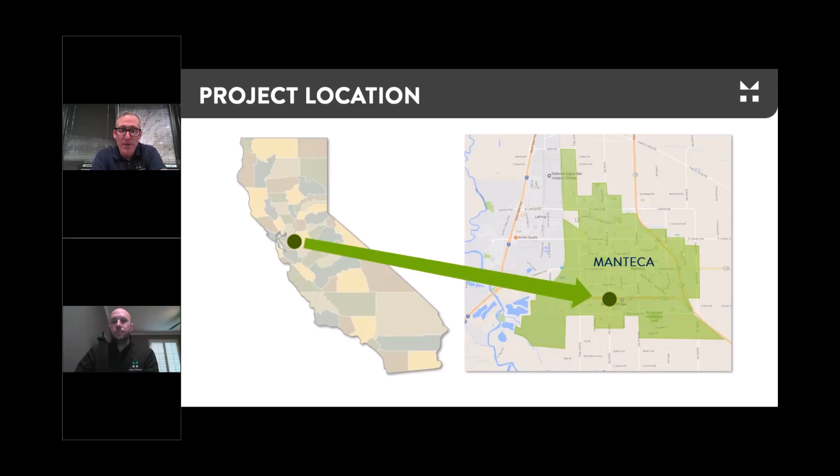Our project was right along State Route 120 at Union Road. State Route 120 was built originally in the 1960s as a 2-lane facility and was widened to a 4-lane facility in the 1980s. There are three main interchanges along State Route 120, with Union Road right in the center, bracketed by Airport Way and Main Street. What you might not be able to see from this photo is the significant residential development on the north side of 120, and a significant amount of ongoing and planned residential and commercial development on the south side of 120.

State Route 120 really experiences peak traffic. It's one of the main routes from Stanislaus County into the Livermore area, and a main connection between State Route 99, I-5, I-205, and I-580. So it really does experience a peak volume of traffic going into the Bay Area in the morning and coming out from the Bay Area in the evening. That's just the existing site conditions.

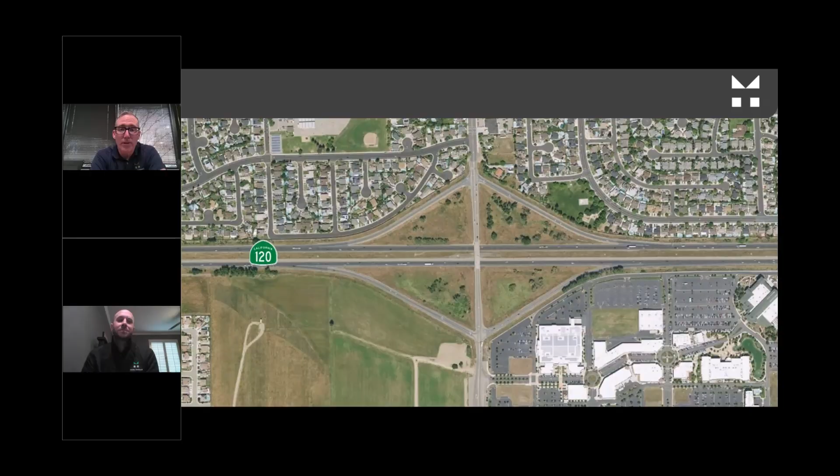Another photo showing the specifics of Union Road. Prior to our project, it was a spread diamond interchange with a 2-lane overcrossing and signalized ramp terminal intersections that were constructed in the mid-90s.

So the city had been working on planned improvements at 120 Union Road since the late 2000s. What you see on the screen there is what had been originally planned: a typical Caltrans L9 partial cloverleaf interchange with a bridge widening and associated ramp improvements.

At the time, the city brought that project to about the 65% design level and then started to run into some real challenges with mainly the overall budget for the improvement. This was about a $30 million interchange in the late 2000s, probably $35 to $40 million in current dollars. The main budget challenge was that the addition of those 2 loop ramps would have required replacement of the entire bridge structure. There were vertical clearance challenges with the loop ramps, requiring a completely new structure to be built. So at the time, around 2009, 2010, the city put the project on the shelf.

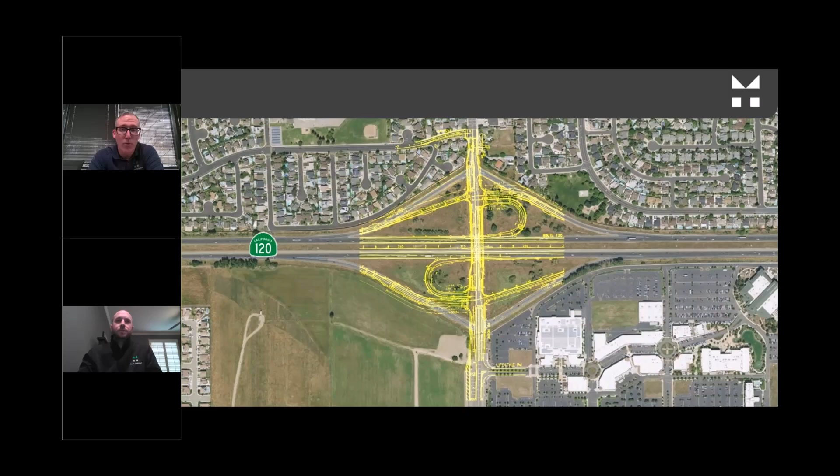There was obviously a downturn in the economy at that time as well, and so the project sat dormant for a period of 4 to 5 years.

As we started talking with the City of Manteca about revisiting the interchange improvements at 120 Union Road, there was some forethought by the city to look at alternative and innovative design concepts. What you see on the screen is a skeleton version of the Diverging Diamond. Around 2013, when we got involved with the city, we knew the Diverging Diamond technology existed in the United States—there were probably 20 to 25 of them in operation or in plan development throughout the country. But Caltrans, and no one in the state of California, had done a Diverging Diamond configuration.

At the time we did some initial high-level traffic analysis to understand if the Diverging Diamond was an option that would relieve congestion, not only on State Route 120 but on the local road along Union Road. We did enough traffic analysis to know it was a viable option. That high-level analysis was presented to Caltrans to see if they would be open to the concept, and in fact they were.

So in about 2014, we started detailed development of traffic forecasting, environmental documentation, and concept geometrics, moving the project through a reinitiation of the environmental document phase and into final PS&E.

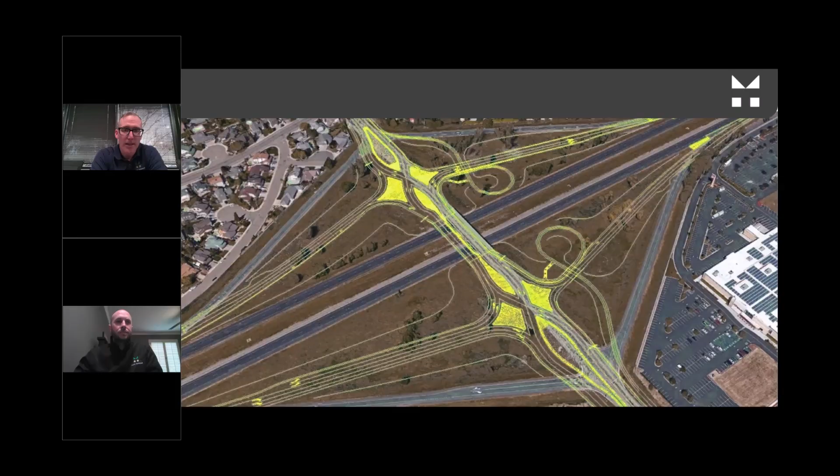What we were starting with, particularly in the state of California, was that there had not been anything specifically developed with Caltrans guidance. There was some level of design standards for diverging diamonds through FHWA, based on best practices from DDIs constructed and operational in other states, along with a very, very draft version of Design Information Bulletin 90. Aaron's going to get into more detail on what was included in DIB 90. What that is, is a design standard for features that need to meet Caltrans Highway Design Manual guidance, but frankly on the newer end of transportation technology.

Throughout the time, we had started with FHWA guidance. We worked with Caltrans District 10 and Caltrans headquarters staff on the development of DIB 90, and we really started to dig into the details of how this diverging diamond would operate from a traffic perspective, how the geometric constraints would be addressed, and how we would move this project into the PS&E phase.

Both the city and Caltrans pushed the envelope at this stage, seeing that there weren't adopted standards at the time. They were both huge project advocates and made a huge contribution to the success of the project.

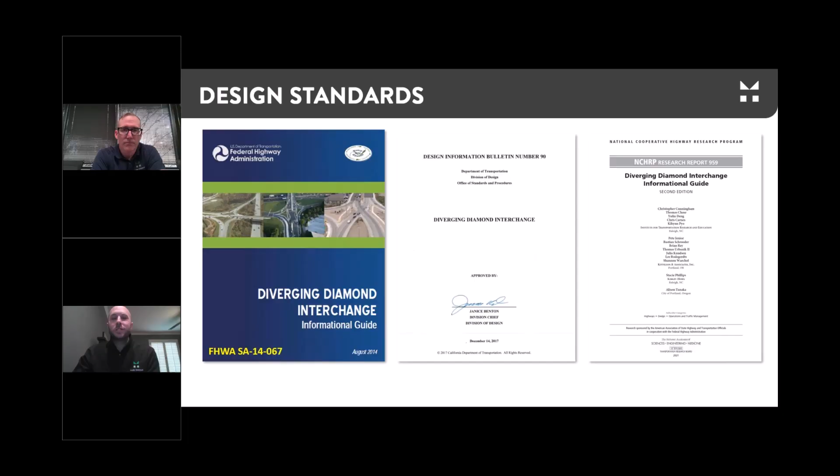The key aspect of a diverging diamond is these crossover intersections. So as you're traveling—in this case, north is pointing to the right...

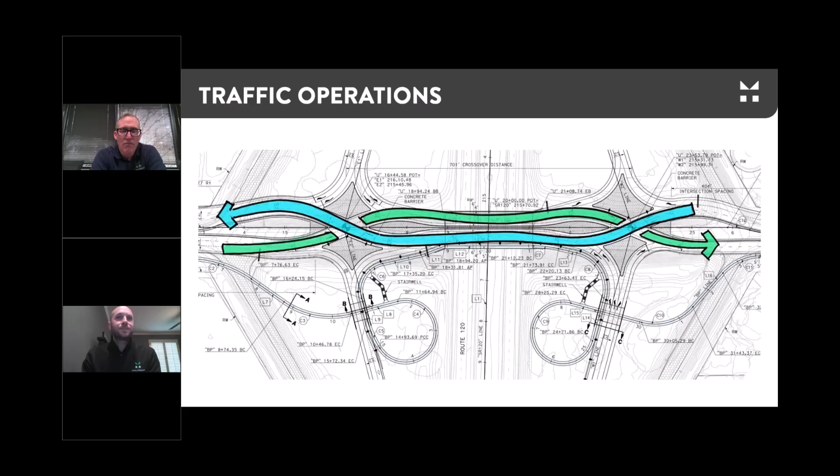If you're traveling north and south, you approach the ramp intersection and cross over to the opposite side of the road. This allows for free movements onto and off of the freeway. Then when you get to the other ramp, you cross back over to the original side of Union Road.

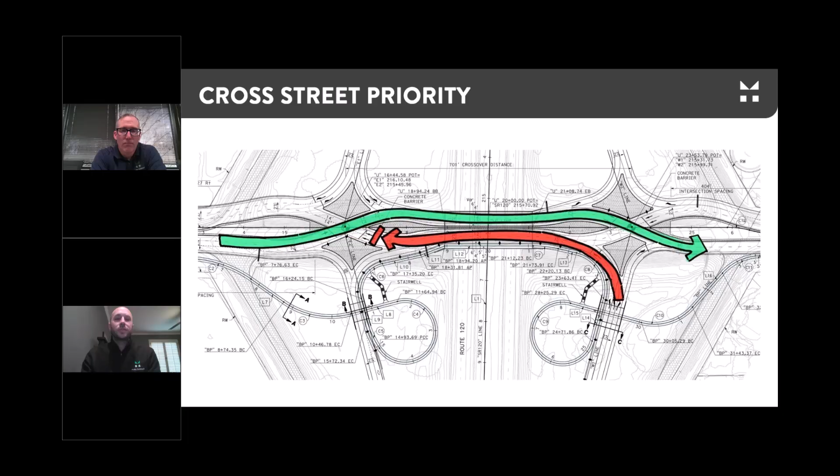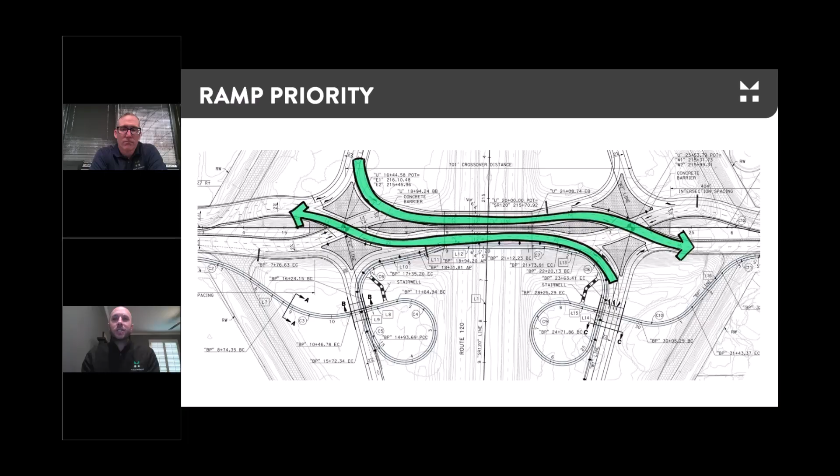There's a few ways you could handle the traffic operations. If there's a heavy through movement during a certain peak time, you could synchronize the signals to allow that through movement to go through with both green phases, while off-ramp traffic queues up over the overcrossing. Alternatively, at a different peak time with heavy on and off-ramp traffic, you could prioritize those and have the ramp signals flush out traffic on the ramps and through the interchange onto the local road.

So in basic summary, a DDI is not much unlike any other diamond interchange other than the intersection control. You still have on and off ramps with left and right turning movements.

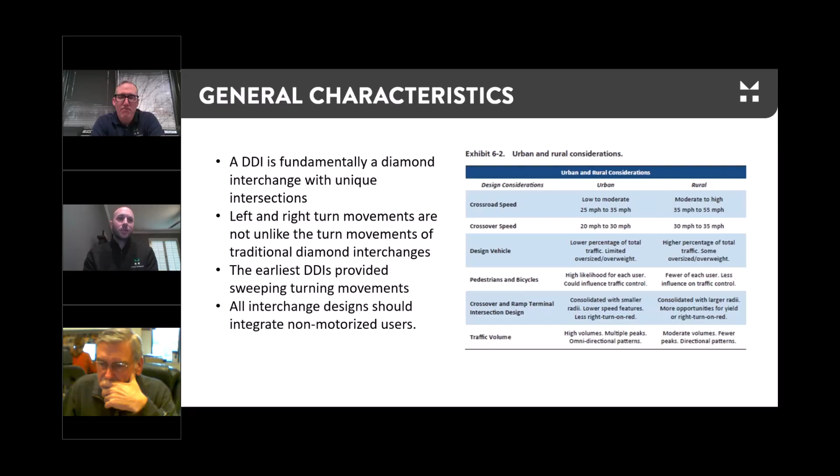Early on in development, DDIs, especially in the Midwest, had very large sweeping turns. This was more in the setting of rural applications where there wasn't a lot of pedestrian and bicycle traffic. But here in California, one of the main focuses is on non-motorized users, our bicycles and pedestrians. So now we're looking at more compact design, sharper turns to control speeds at those vulnerable points where those crossings are happening.

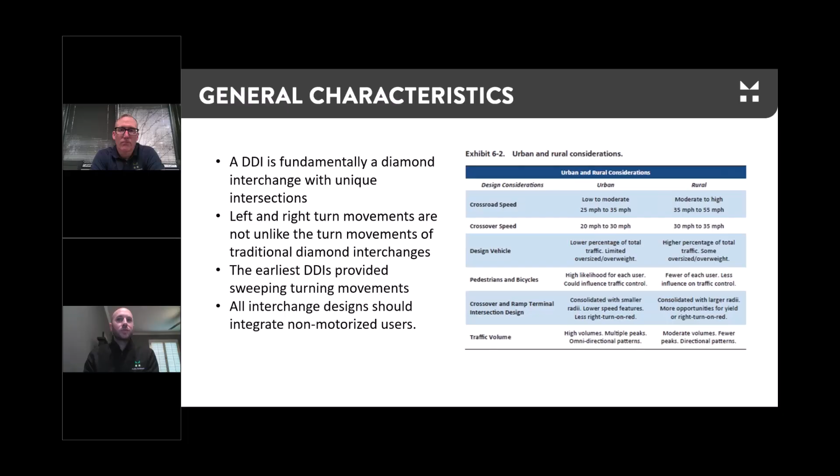I wanted to walk through, now that it's open and operational, some of the key challenges associated with getting this project from something that hadn't been done before in California through a Caltrans approval process. I identified these four main topics.

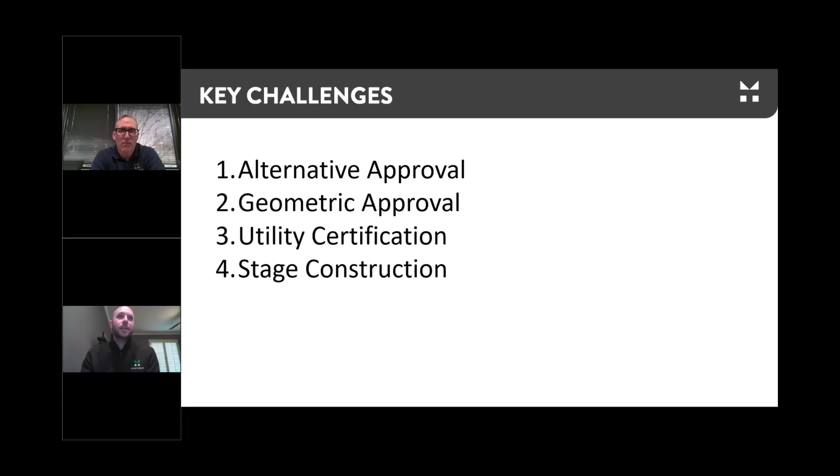First, getting the alternative approved, walking through some of the geometric changes, utilities, which happens on most every project we deal with and becomes a challenge, and then stage construction, which is specific to the DDI. Matt alluded to it earlier - because the city had already had an approved alternative with the L9 or the partial cloverleaf interchange, what our team did first was process a supplemental project report and an environmental revalidation.

It was a relatively quick process, supported by the traffic analysis performed by our partner Fehr and Peers. What it showed was that both interchanges operate pretty similarly, because of the efficiencies of the tight diamond. But the benefit it did bring was a reduction in project costs. We were able to maintain the existing structure and avoid right-of-way acquisitions.

So getting this alternative process was a relatively straightforward exercise. It just followed the Caltrans process.

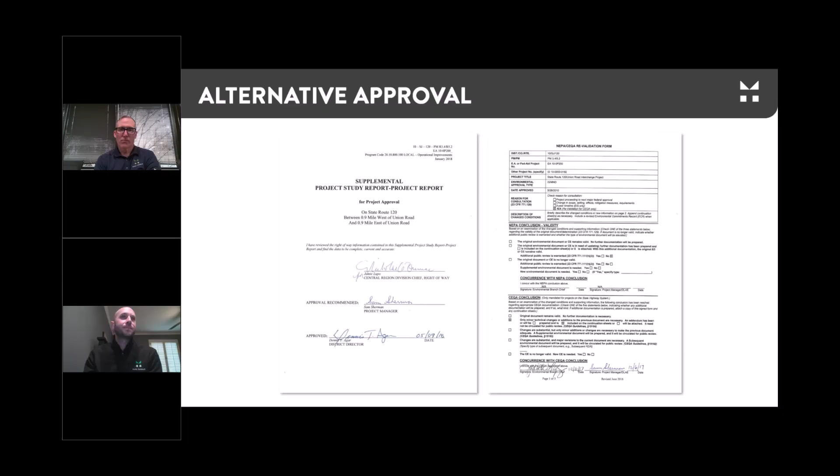When it came to geometric design, there's one key aspect to the diverging diamond as it applies to DIB 90: this DDI boundary. Everything outside of this blue box follows the highway design manual, from ramp divergence, lane widths, super elevation profiles - all of that is still consistent. But when you are within this boundary, that is where DIB 90 comes into play.

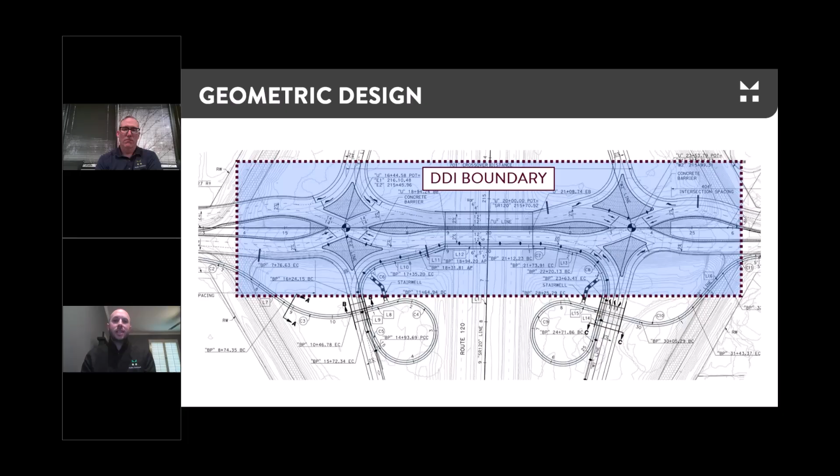It's because in order to control the size, speed, and operations of these crossover intersections, there are very specific design elements that aren't consistent with the Highway Design Manual. I was going to walk through some relatively quickly, just so you could see what those main differences are.

In the Highway Design Manual, typical interchanges are designed to a minimum design speed of 45 miles an hour. With DIB 90 or the DDI, the range is now reduced to a maximum of between 25 and 35 miles an hour. This helps control the size of the crossover intersections. That reduction in speed actually brings another safety benefit, especially when thinking about on-street bicycle facilities or pedestrians crossing the ramps - you have much lower operating speeds.

Super elevation with these crossover curves, if standard super elevation was applied, they'd be really large curves or highly super elevated, which means the cross slope of the road would get banked. But with DIB 90, you could use an adverse super or a normal crown through the crossovers, which improves the drivability and the size of these intersections.

This one is a slight change. A lot of older interchanges have steep approaches and tight vertical curves over the state facility, and there's a chance of heavy or tall vehicles to overturn on steep grades as they intersect with the ramps. Normally that's maxed out at 4%, but with a DDI, it's been increased to 5%, because these heavier vehicles aren't crossing over the crown where they would have that shift in weight. They stay on the opposite side of the road, which helps improve that situation.

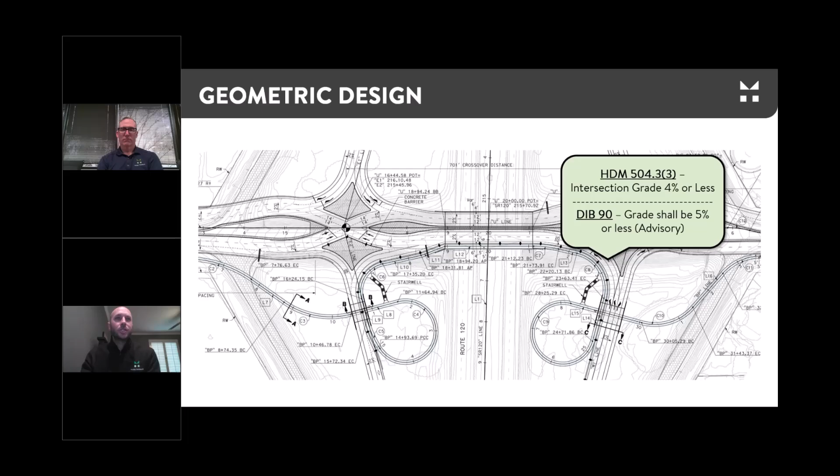As far as lane widths, the same HDM standard still applies. Normal lane widths are 12 feet for Caltrans facilities, but through the curves, there's widening for off-tracking. You see this not only in DDI design, but loop off-ramp design. Those inside lanes are often widened for tractor trailer off-tracking, similar to roundabouts where you have multi-lane roundabouts. The entry or throat of the roundabout is also widened to control path overlap.

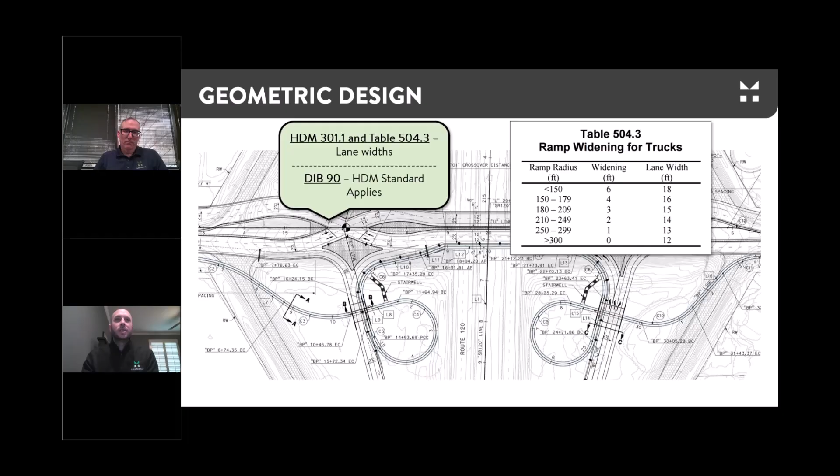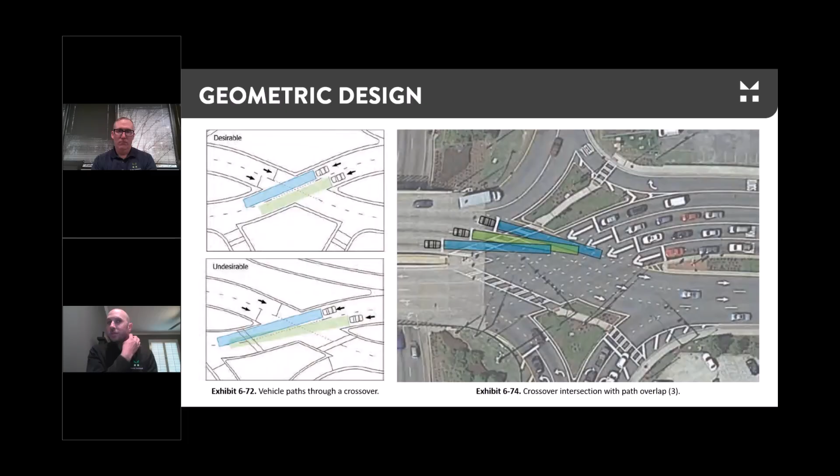And this is what I mean about path overlap. There's the natural progression of people, as they approach an intersection, to head in the direction that their approach angle is. So it's really critical to provide that striping to help control that movement.

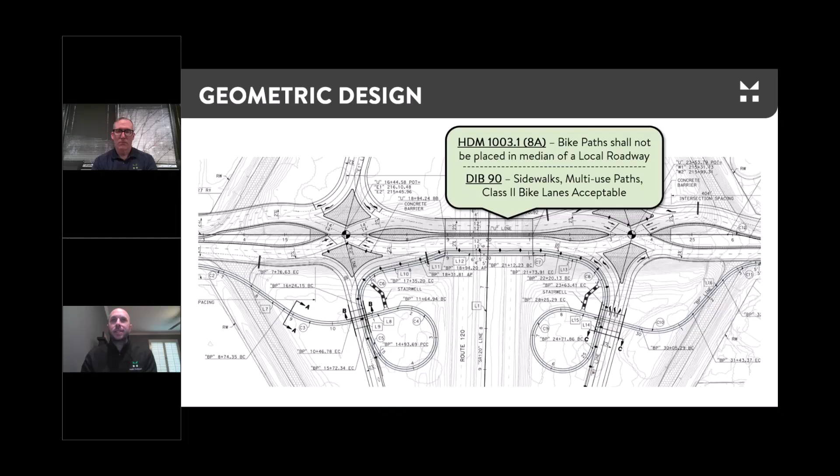This one was pretty interesting. Bike paths in the HDM states shouldn't be placed in the median, but that's actually a pretty standard treatment for DDI design—putting pedestrians and bicyclists in the center through a class 1 path. So DIB 90 addresses that.

Some of the key main points about these crossover intersections: Caltrans requires a crossover angle of between 40 and 45 degrees. The reason for that is it really helps control the potential for wrong way movements—it encourages vehicles to cross over at the intersection. Other states have adopted more narrow crossover angles, all the way down to 25 degrees, but California is stuck with a steeper angle to help prevent those wrong way movements.

In the event that there's a constraint and you need to go to a shallower angle, there are ways to get approval, just like a normal interchange project through the HDM. There's a design decision document to document non-standard features, but you want to make sure you're meeting some of the performance checks. One of them is making sure that those eyebrow islands—the island highlighted in green—intercept the clear line of sight, so a vehicle can clearly see there's an obstruction and cannot continue forward on wrong way approaching traffic.

Another element is having a nice tangent in between the crossover curves. Similar to the path overlap, you want people lined up through the intersection so they complete the crossover and understand which direction they're heading.

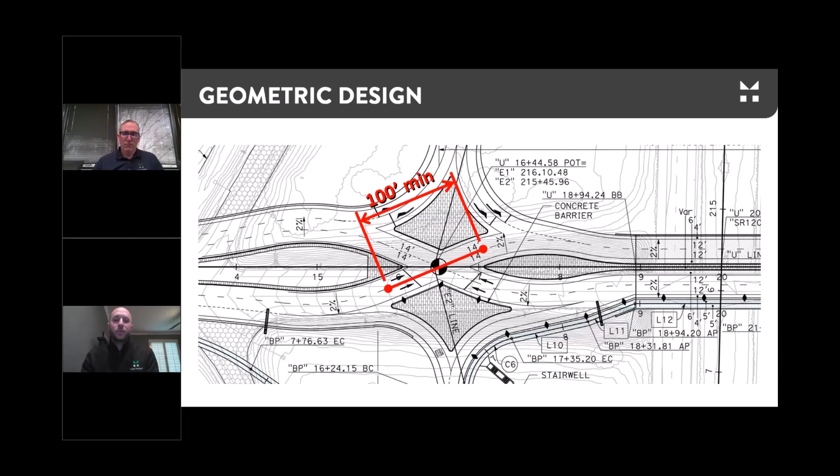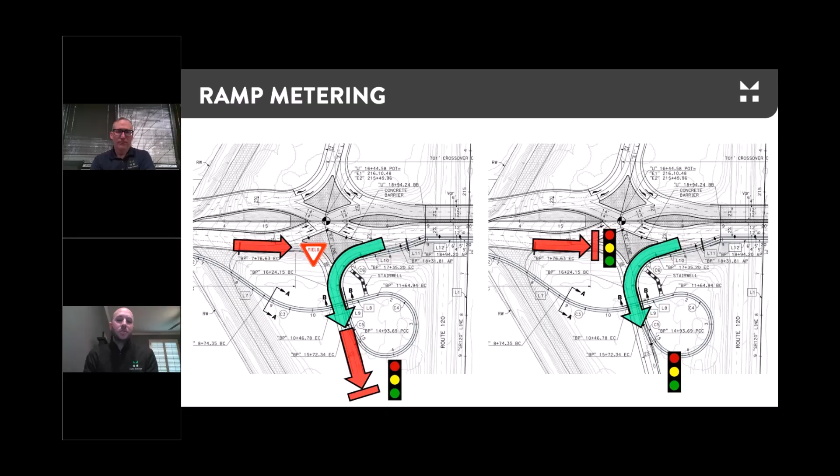What we've done to address that is install loop detection near where the queues would extend—essentially queue detection. In the future, if that becomes an issue, we could signalize the local road movement, shown on the right, to prevent them from entering on the ramp, still prioritizing the ramp movement between the two ramp intersections. That way we could control the queues and not affect the adjacent traffic signal.

There's another option of keeping pedestrians on the outside. You typically see this on undercrossings where there might be obstructions like bridge columns that would be occupied in the median, so you keep the pedestrians on the outside instead.

And then there's what we did at Union Road. We prepared plans for a grade separation, or grade-separated bike path, that carries both bicycles and pedestrians and is completely grade-separated from the on and off ramps in Highway 120. This was presented to City Council and approved as a design element.

The city was fortunate enough to work with SJCOG to get additional funding to fund the construction of the additional structures for the grade-separated path.

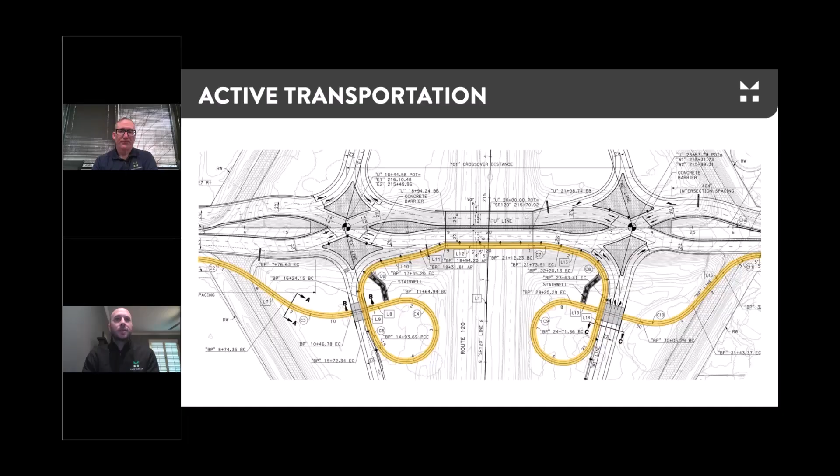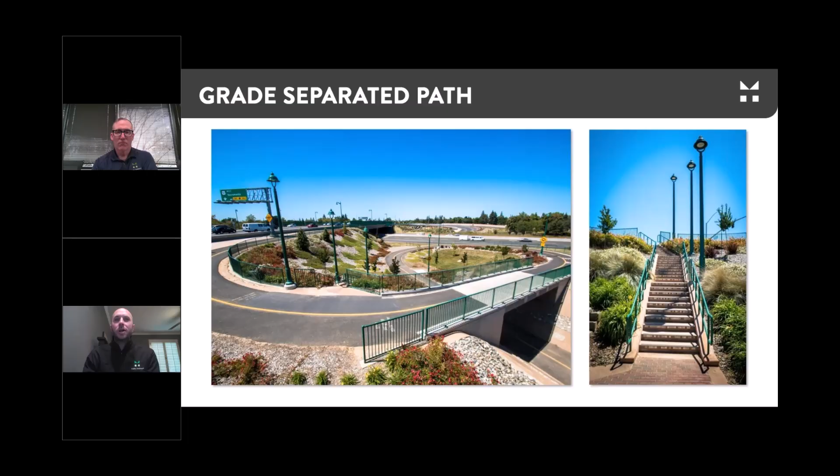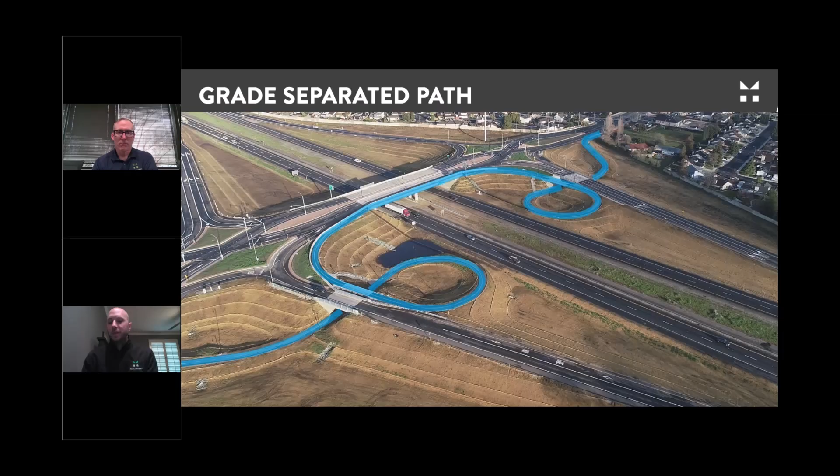And then here's a picture of it constructed at Union Road. Highlighted in blue is the path, so you can see users can cross both ramps and the freeway without having to cross a single lane of traffic.

Now to our next challenge. It came down to some overhead utilities. The existing site had wood pole overhead electric lines, and the span was too great to be able to remove all the facilities outside of the Caltrans right-of-way, which required a policy exception through Caltrans.

This was one of our bigger hurdles, and it became challenging because of lack of documentation between the utility owner and Caltrans as far as prior rights and the master agreement between the state and the utility owner. It required almost a year straight of constant coordination to get the utility relocation processed and approved, and this policy exception of keeping utilities within the state right-of-way approved.

In the end, it was a relatively expensive relocation, I think it was $2 million, with these large towers that were installed as part of the construction of the project.

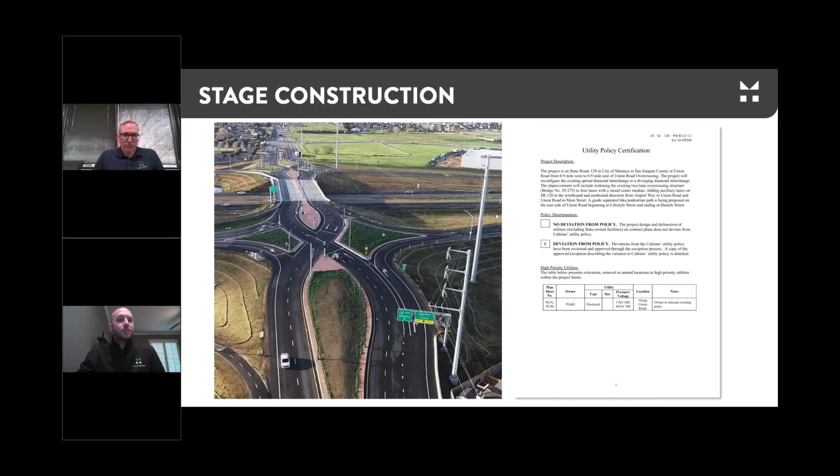And then stage construction. So the next couple slides show the project in construction. This is showing the widening of the existing overcrossing. You can see it's much wider than what was out there before. The new ramps were constructed on the eastbound side, or the east side, of the overcrossing while the old ramps were in operation.

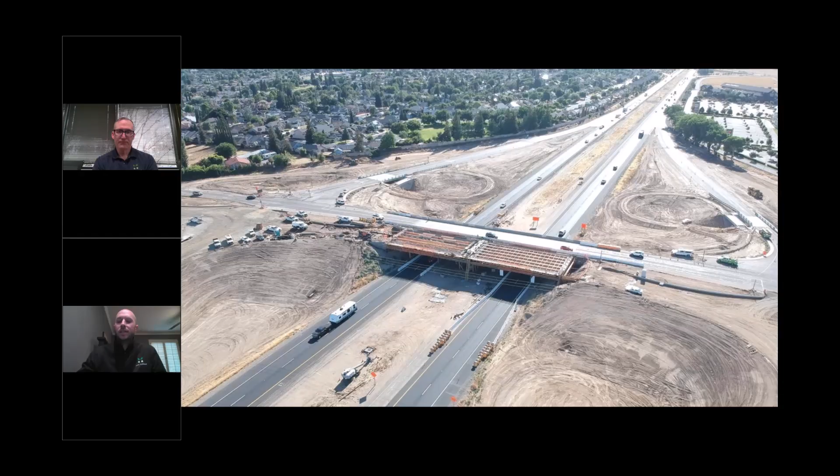But then the contractor came back to the city and Caltrans and proposed an alternative where they could shut down the westbound ramps. What that allowed them to do is really accelerate the construction. It saved the city quite a bit of money, and it was great to have Caltrans being able to approve this change in the field.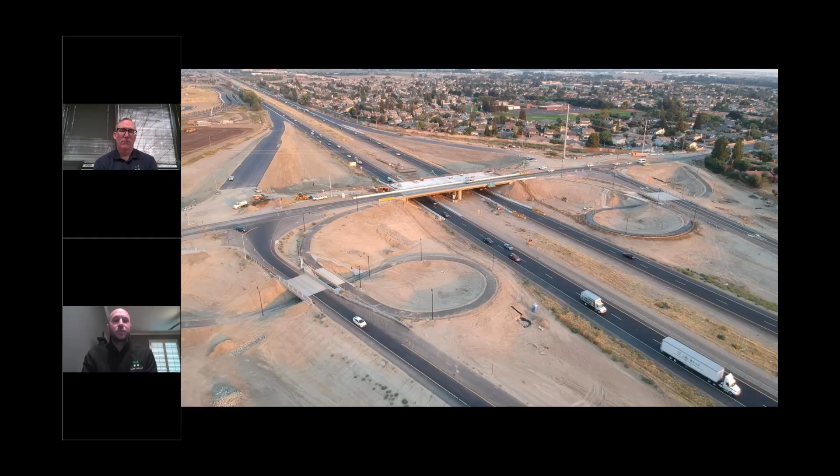One of the benefits is that there's mile spacing between local interchanges on 120, so the detour routes were relatively direct, and it really enabled the city to shut the interchange down for several months to help aid in that construction.

Here's the detour plan, and it actually went a step further. One of the biggest challenges with a diverging diamond is how you start the crossover, how you initiate the crossover, because everything operates as a tight diamond with typical right and left turn movements.

In order to really get the crossover to operate upon opening, you need to have the final striping and the signals operational. And the signals being operational means putting in foundations where there might be some existing traffic control, running conduit, getting the cabinet set up and testing. That does take quite a bit of time.

Originally, it was thought to take about a 2-week period, but with the closure of the interchange, the contractor and Caltrans inspection were able to go ahead and implement those improvements without live traffic, then reopen the interchange in its final configuration. So if you're faced with doing a diverging diamond, I would suggest fully vetting out how stage construction and that changeover will operate early on in the process and getting that approved.

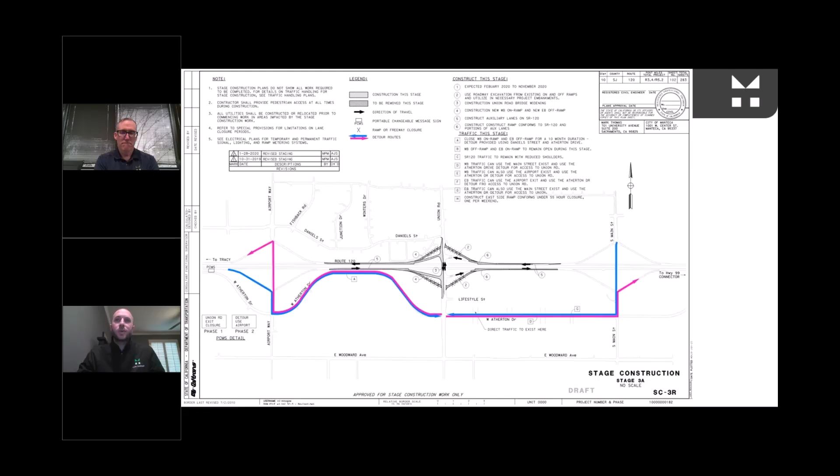Now that it's operational, we haven't really heard any negative feedback from the community or the city. It is operating very efficiently.

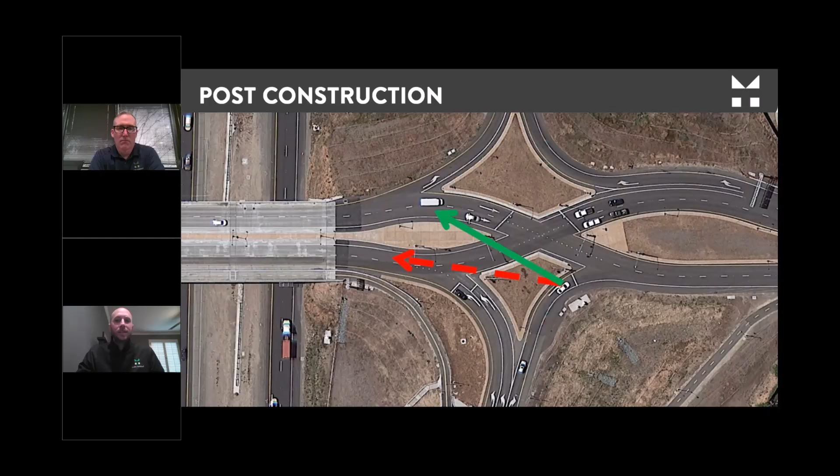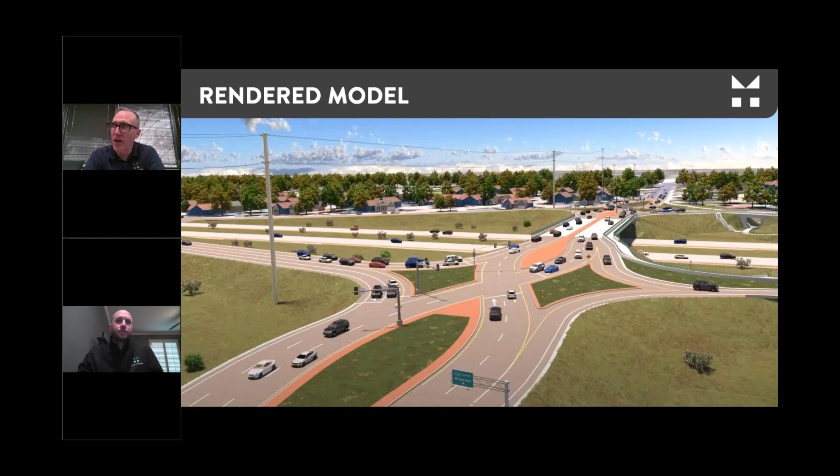And then we get into the rendering. Matt, you want to step back in and talk about some of the materials we prepared for outreach? Yeah, absolutely. As we moved through final design, we wanted to understand how to communicate this out to the public, so we went ahead and did a fully rendered model. That's what you see here on the screen. We wanted to get these images out to the public so they could understand, post-construction, how the operation of the interchange needed to take place. So this reflects our rendered model.

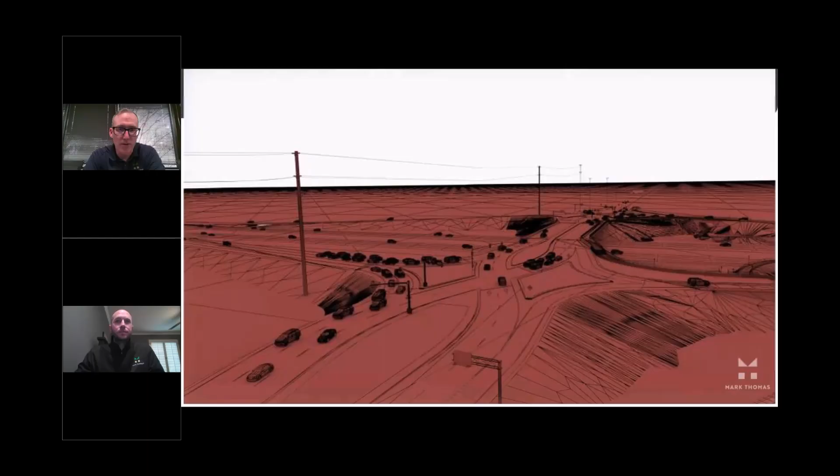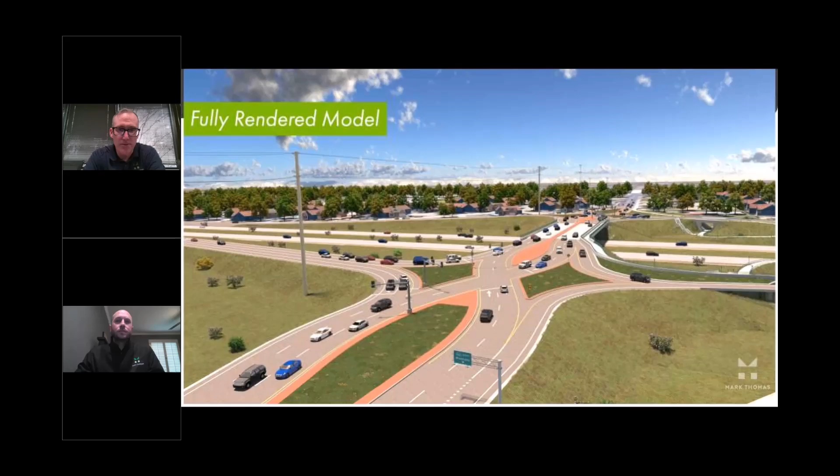This is a video showing pre, during, and post construction. I'll just let this play. This is the framework of our initial 3D model before rendering. This is our fully rendered model showing operation of the interchange. And this is a drone video of the constructed project. It's pretty cool to see, from concept to reality, how all of this came together. This was very useful as we presented this configuration and concept to the public.

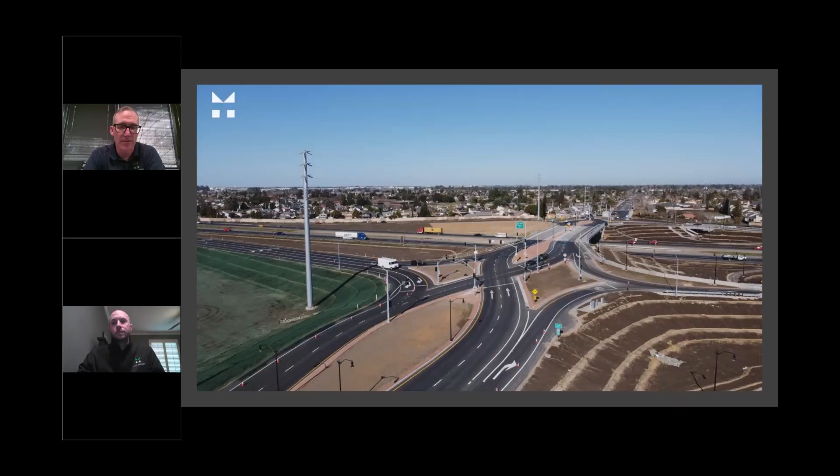I'm going to spend a couple of minutes talking about some ongoing work on a diverging diamond we're doing at I-580 and International Parkway in the city of Tracy.

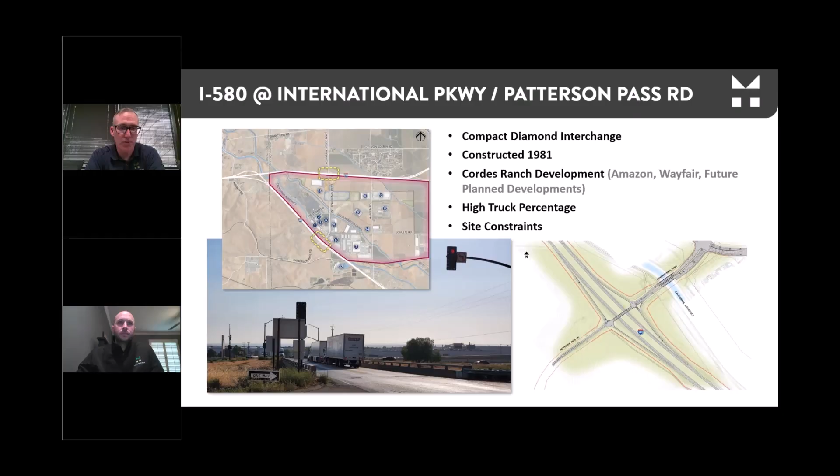Unlike Union Road, there were some pretty significant right-of-way constraints at International Parkway and Patterson Pass Road in the city of Tracy. There are major commercial and logistics developments in the triangle between I-580 and I-205. The existing configuration is a tight diamond interchange with a 2-lane overcrossing, but it has a significant amount of truck volume associated with those adjacent developments—about 26% trucks operating on this interchange daily.

We started working with the city of Tracy about 4 or 5 years ago, and the diverging diamond concept floated to the top. What we're proposing and finalizing construction documents for is a diverging diamond configuration, a bridge widening, ramp configurations, and modifications to address the traffic issues and safety needs at the interchange.

I think the biggest difference between the City of Manteca's project and the City of Tracy's project is that this diverging diamond configuration was about the same cost as the other alternatives from a construction perspective. But the major factor in selecting it was that we were able to eliminate right-of-way impacts to an existing gas station on the south side of I-580 in Tracy. The gas station went from a full take to no take at all, which probably saved the project about $6 to $10 million in overall programming cost.

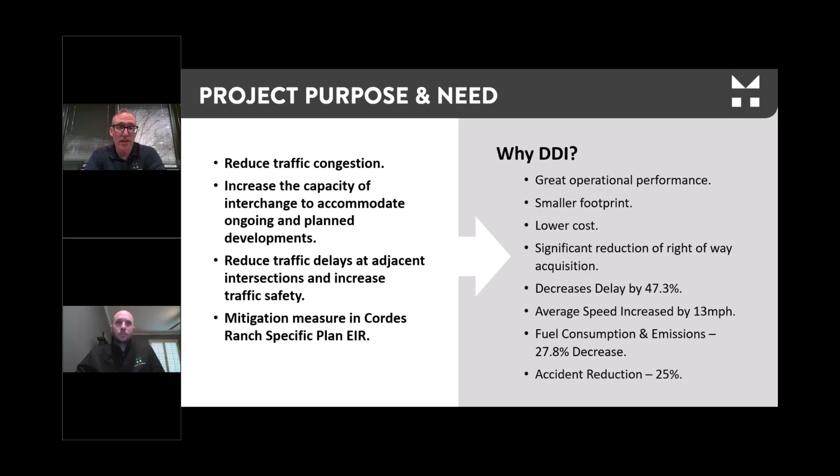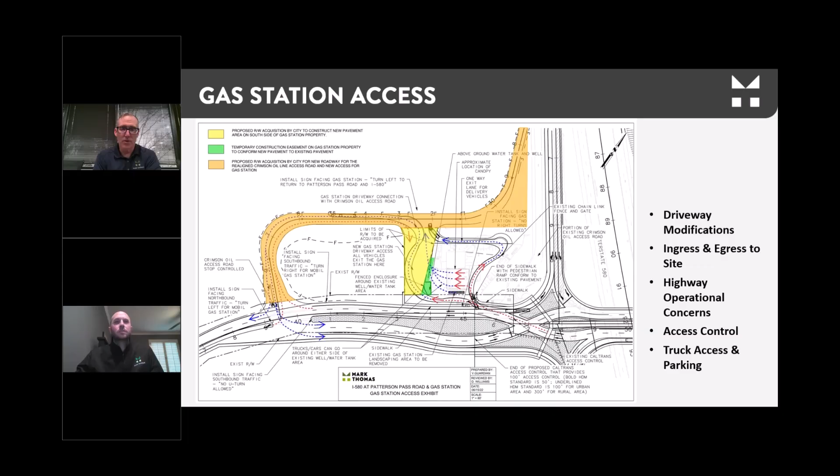What ended up resulting in the final design solution was that they had full access from Patterson Pass Road prior to the project design. Caltrans, from a safety and operational perspective, required us to reduce that to a right-in, right-out access. So we had a lot of back and forth with the property owner to demonstrate and show how vehicles would get in, navigate through the existing gas station into the pumps, and then egress back out to Patterson Pass Road through a new access road and local roadway connection. Again, a lot of interaction with Caltrans, FHWA, and the property owner to land on this configuration.

On schedule, we're very close to our RTL, ready to list date, April 21st, coming up in about a month. We are barreling towards our California Transportation Commission funding allocation in June of this year. It's a very important date for us because we have about $25 million of state funding on the line that will go away if we don't meet that June 28th and 29th meeting date. But things seem to be on track for us to get to that RTL in April, and advertise the project for construction in September of this year.

So that's what we had for the presentation. We're happy to answer any questions about the process, the configuration of the DDI, some of the approvals we went through. So I think we'll open it up to any questions that you may have.

I guess I'll just ask. So what's the timing? You named it A and M. What does the A and M mean? You had 25 and 35, and then 35 and 45, but they had an A and an M next to them. Which slide was that on?

So I think what you're referring to is a little outdated in the fact that Caltrans referred to design exceptions or design standards as advisory and mandatory. Now they're bold-faced and underlined. So they're essentially how Caltrans divvies out approval. Some can be handled at a district level, and then some require headquarters approval.

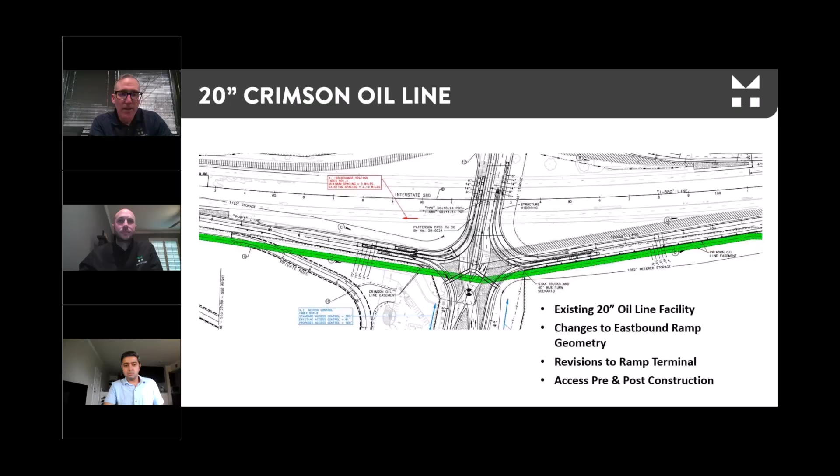Where's that gas station you were talking about? It wasn't on the photo we just had, but if you go back on the slide deck, there you go. It's right in that location, immediately adjacent to the ramps. Their existing driveway is probably 75 feet from the end of the ramp terminal, so it definitely needed cleaning up with the access. A typical L9 interchange configuration through here would have wiped out and gone right through the building of that existing gas station. It would have been a complete take.

I have a question. Are there any more areas within the state targeting to put DDIs? Great question, Alfredo. Right now we just kicked this off with the City of Manteca.

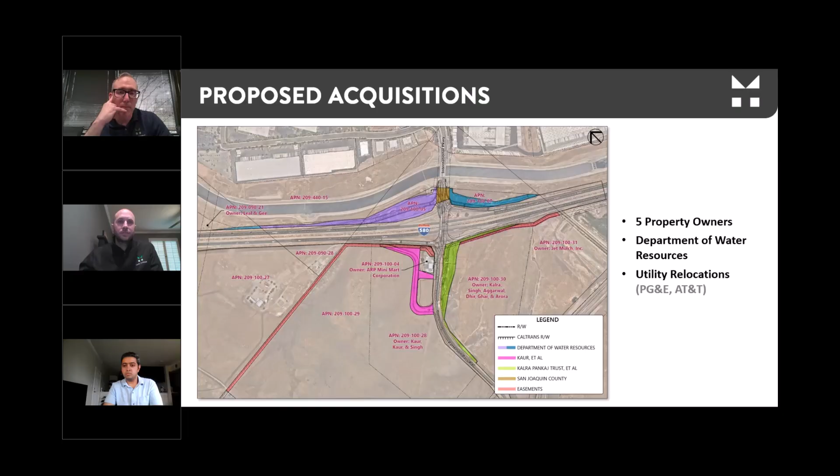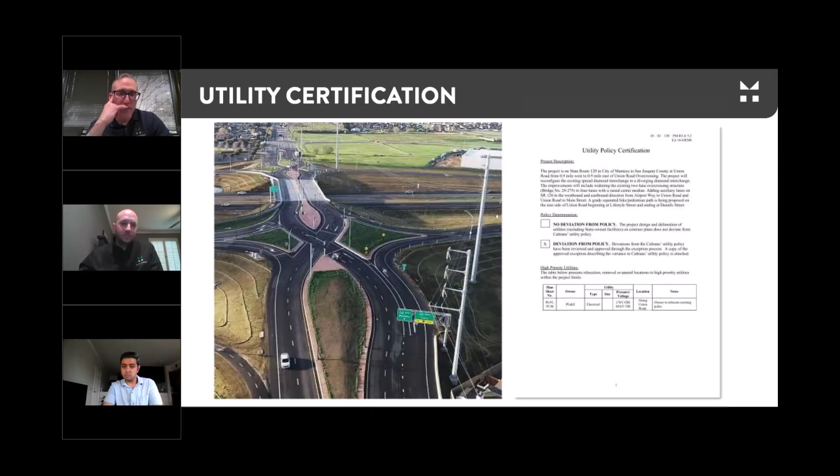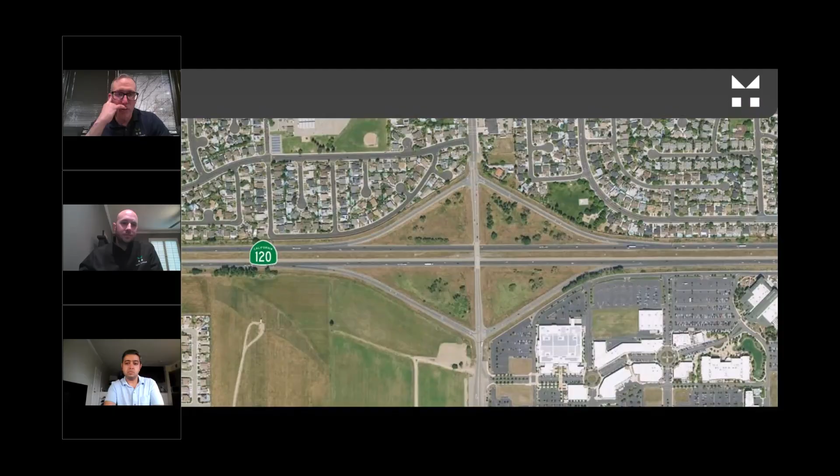Because of the success of the interchange at Union Road and 120, we're actually moving forward with plans to develop DDIs at the two adjacent interchanges, at Main Street and Airport Way. We're currently working with city staff to develop project study reports for development of diverging diamonds at those two locations. You can see they're the same interchange type as Union Road.

What we're working with Alfredo and the City of Manteca on is to build on the success of Union Road, develop PSRs for Main Street and Airport, and then go seek federal or state funding for the development of diverging diamonds at those two locations as well. We're very excited to continue our relationship with the city on that one.

In addition to 580 Patterson Pass, we're in concept development and environmental clearance phase for a diverging diamond at I-5 Louise Avenue in the city of Lathrop. That one's a little different in the sense that it's an undercrossing local facility of I-5 as opposed to an overcrossing. There are slight and minor differences, particularly regarding pedestrian access and access underneath the structure because it's an undercrossing. But we're working with District 10 staff and the city of Lathrop on that one as well.

There is one, I think, operational in Southern California, and there's probably 10 to 15 getting through their final approvals. So it is something that the state has embraced and is implementing throughout California.